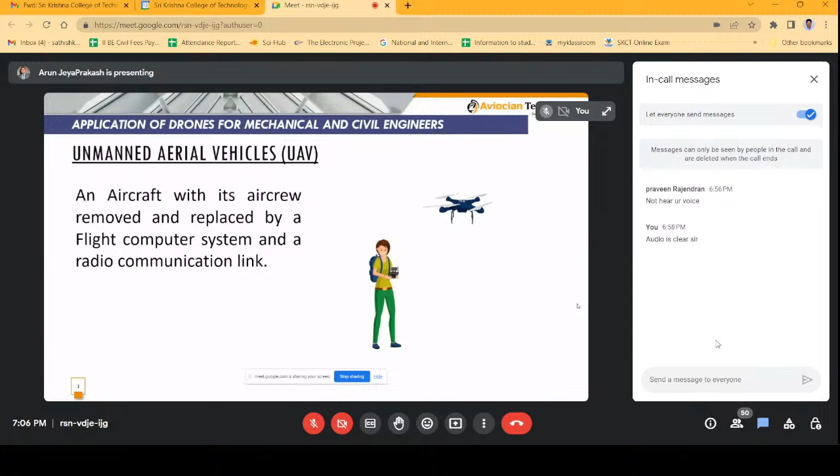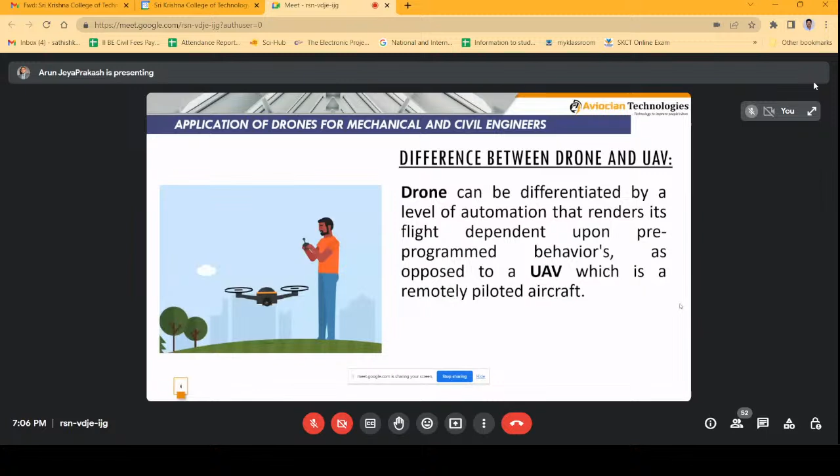So whenever we talk about unmanned aerial vehicles, another term that comes into the picture is drones. So what is the basic difference between a drone and an unmanned aerial vehicle? A drone itself is an unmanned aerial vehicle, but it has a level of automation that makes it a little different from a UAV. That is like automatic takeoff, automatically go around and gather some intelligence and come back and land itself. So this kind of intelligent pre-programmed behavior is what makes a drone more intelligent. So this is basically the difference between a drone and an unmanned aerial vehicle.

So whenever we talk unmanned aerial vehicle, the first thing that comes is the military application, because drones are not something very new. It's been with us more than a century, where Austria attacked one of the countries using balloons carrying weapons. So that is how the application of drones started, in protecting the country and its borders.

So over a period of time, there are many wars, and many countries have fought to protect their borders and protect their people. So during this war scenario is where the government invests a lot in terms of technology, R&D, to develop products and solutions to protect the country. So on that note, all these drones were developed over the period of time.

So in the commercial market, if we look into it, these are the different types of drones that are used: multi-rotor drones, fixed wing drones, single rotor, and fixed wing hybrid VTOL. So every drone has its own pros and cons. So depending upon the application, one has to select the right choice of drone.

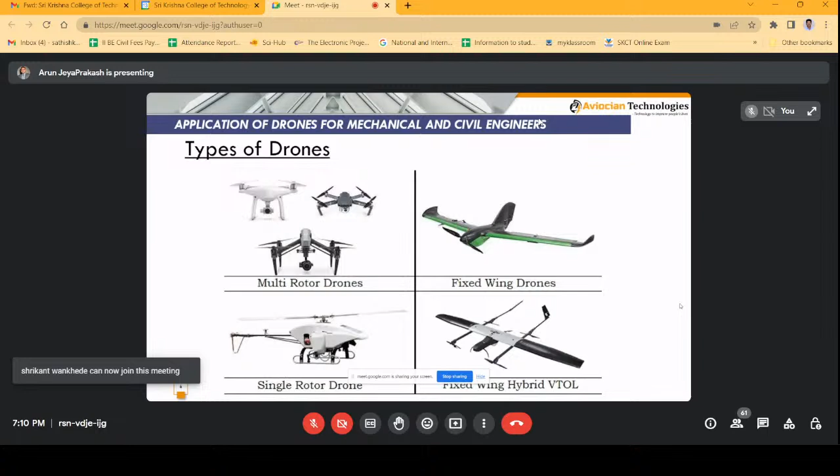So this is the introduction about the different drones used in the commercial market for different applications. And all these drones are more customized, with more power and more payload carrying capability in the commercial markets. So with respect to aeronautical or mechanical engineering, what the engineer's role will be is what I'm going to present in the upcoming slides.

So this is the Department of Defense Standard 2167A for any product development for drones, or any product. Say for example, the entire drone I have to design and develop, or a small portion or payload I want to develop for the drone, it has to go through all these processes. The upper one is about the hardware development, and the bottom one is for the software development.

Say for example, today a customer is coming to me and saying, Arun, I need a drone for some inspection purpose. It has to carry a camera payload of say 2 kg, and it has to fly for more than 30 minutes. So these are the requirements the customer is sharing. So based on the requirements, only then will the drone be developed. That is why the first step of this process is system requirement analysis / design, which means you are hearing the requirements from the customer, and only then are you going to develop it as a product.

So once you hear it from the customer, then you will have certain review meetings, and only then will it go for the hardware requirement analysis, where you will try to understand, to develop this drone and meet the customer requirement, what are the different hardwares we need to use in terms of engines, motors, or payload capacity. So we understand the hardware requirement analysis, and then we go for the preliminary design.

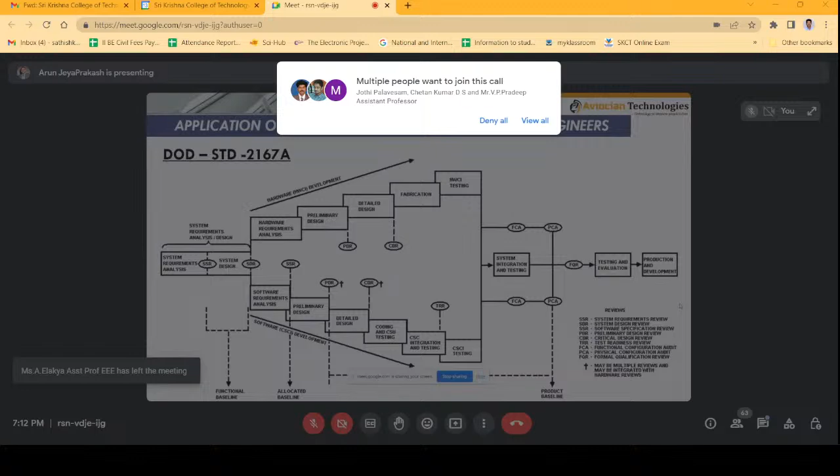So preliminary design is where the design will be done based on the selection of hardware components, because the primary requirement is you have to accommodate these components inside the drone for it to carry. So that is how the preliminary design will be done. Then after preliminary design, a review will be done, PDR, that's a preliminary design review.

Then after the team agrees to the meeting requirements, it goes to the detailed design, where with tools like CATIA or SolidWorks or Autodesk Fusion 360, the detailed design will be done in a 3D model scale. And then again a critical design review will happen to understand whether this design is meeting all the requirements, and then it will go for fabrication and testing and final evaluation as a product.

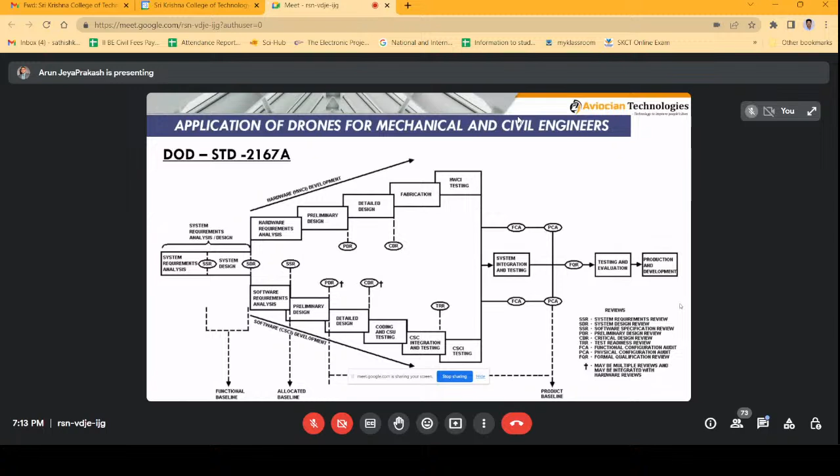So this is how the cycle will go for developing the entire drone, or even a small payload you want to develop. This is how the cycle goes. And the same goes for the software in terms of coding and testing. It will go instead of fabrication and production. So this is a standard process that is followed in any industry.

And when you talk about the phases of design, design basically has three phases. One is the conceptual phase, the second is the preliminary phase, and the third one is the detailed phase. In conceptual design, what you have in your mind, you will just express it with paper and pencil, just a rough sketch, like you just scribble it around or draw it. This is how I want the drone to be, or this is how I want the payload to be. You do a rough design, so that becomes the conceptual design.

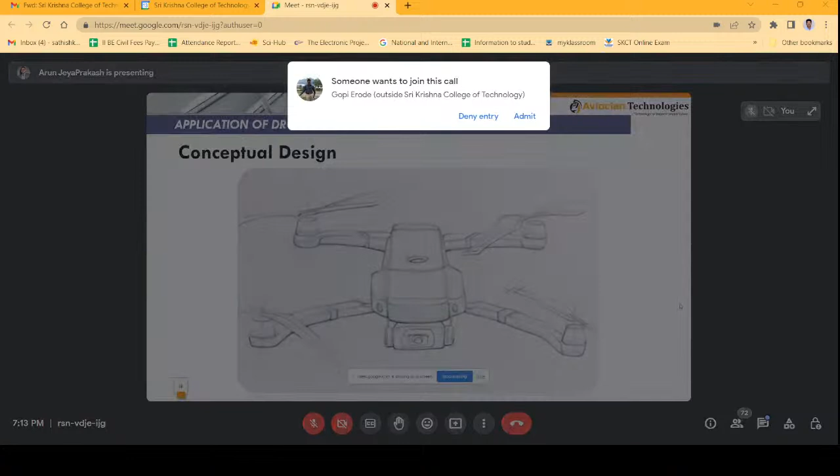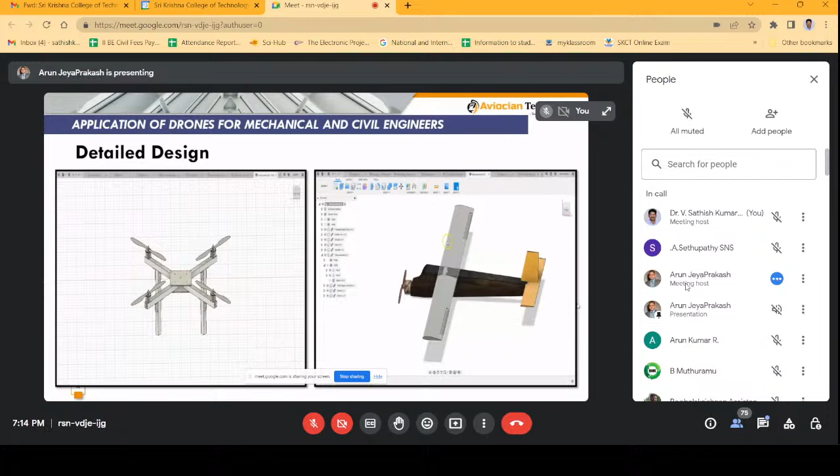So when you give some values to it, like say the arm length should be this much, or it should have a landing gear of certain height, when you start giving the values, then it becomes a preliminary design. You are able to make it more meaningful, and it will become detailed design when you understand every inch or parameter of your design. Then you can use software tools to design your own drone, whether it may be a multi-rotor or an aircraft.

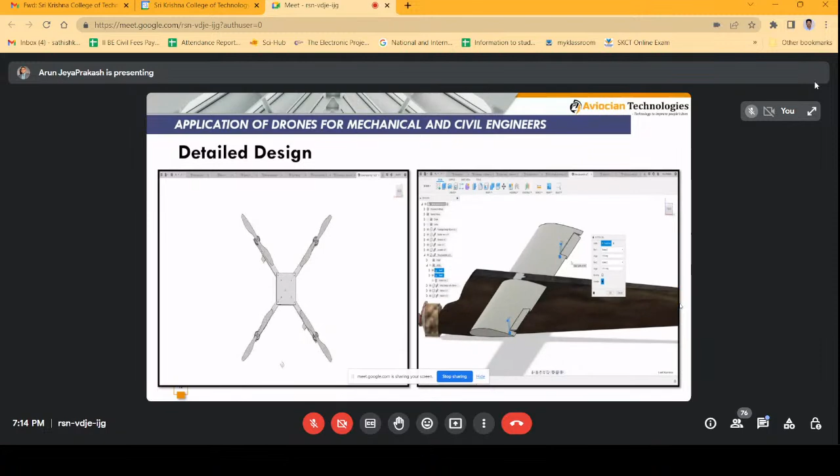You can use the softwares to design it entirely as a 3D model, and you can understand how all those different equipments will fit in the drone, including the payload. So that is what people have to do at the detailed design level. Once your detailed design is done, a very important phase that comes into the picture is analysis. Because you have designed it doesn't mean that it's going to fly or do great, unless and until it does certain simulations successfully. Simulations like aerodynamics, structure, and vibration.

I believe all these three can be related to civil also, because even in civil, tall structures are developed with some aerodynamic analysis. The wind flow over the structure is studied by civil engineers, and structure plays a huge role even for developing a drone. For civil engineers, for the structure, they do a lot of BIM and a lot of analysis. And vibration also plays a huge role in both cases.

In a drone, we cannot allow vibration, because these vibrations can make the drone unstable, and it can crash. So we need to damp out those vibrations. All these different types of analysis are supposed to be done by the mechanical engineers. This will be the major role for mechanical engineers, right from the design concept to the complete analysis, and showing the end user that this design will definitely work, it can carry the payload, and it can meet all your requirements. So this is a major role for mechanical engineers.

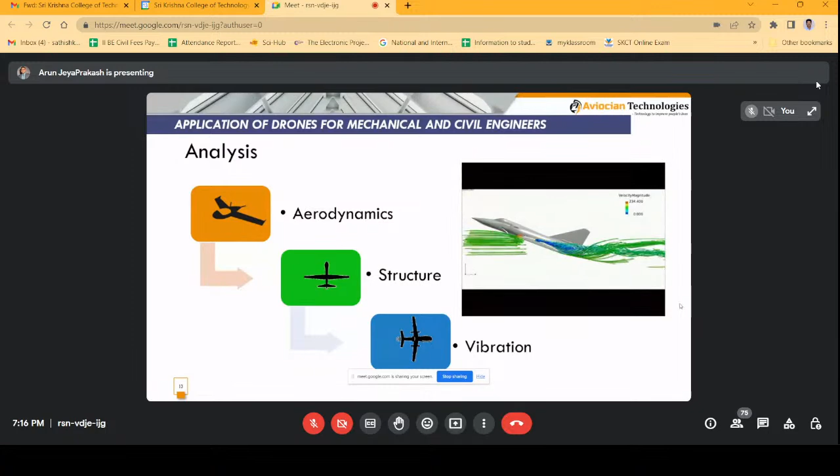So moving to a little bit of electronics, it also has to be a part of mechanical now, because nowadays EV vehicles are coming into the picture. All your engine kind of vehicles are now slowly getting replaced by EV, electric vehicles. Even the aircraft industry is looking at electronics, motor-based aircraft as transportation, and even drone taxis are also coming into the picture. So we cannot neglect the use of these electronics in mechanical engineering.

So mechanical engineers should have a clear understanding of the different components that are used to build these drones. These components we call avionics. Avionics stands for aviation electronics. How we are going to integrate all these different systems is also knowledge that is required for mechanical engineers. Starting from the motor, the BLDC motor, a brushless DC motor that's used in the industry for drones.

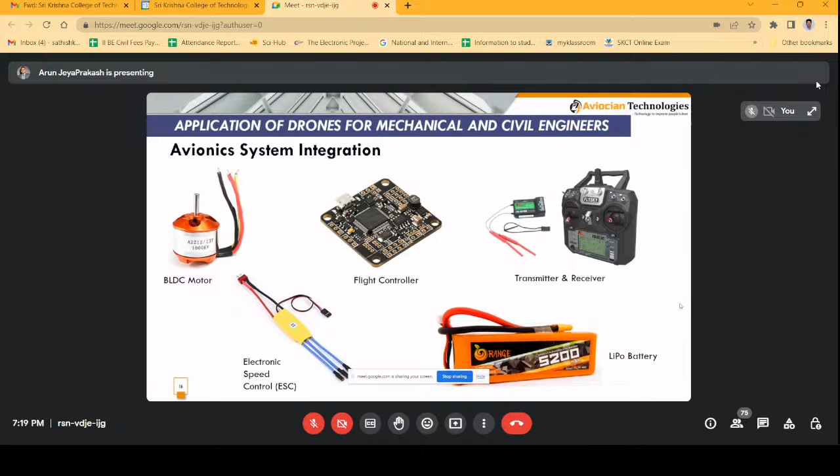When we talk about the flight controller, there are n number of flight controllers available in the market. So one has to have a proper understanding of what type of flight controller I should select for my own drone for certain applications. The choice of controller depends upon various parameters. If you want to develop the drone as a proof of concept, then you can go for a manual drone, just manually fly it, and show the proof of concept of whatever project you are trying to do. Or if the project intention is to show autonomous capability, then you need to select a flight controller that will allow you to integrate a GPS kind of system, where autonomous navigation is possible. That kind of flight controller you have to choose.

And again, the controllers will also be divided based upon whether you're going to use it for a fixed wing or for multi-rotor type drones. You can also classify whether it's open source programmable, so that you can do some Python coding or something and tweak it a little as per your requirements, or it's a closed one that doesn't allow you to make any changes. And the user-friendly interface, whether you are able to do all the interfacing properly.

And finally, the budget, that's also a major concern. When you develop a drone for a particular application or project, whether these types of controllers fit into the budget. Because as the number of features goes higher and higher, the budget also climbs up accordingly. So one has to decide based on the application and the need what type of flight controller to choose. This knowledge is also very important.

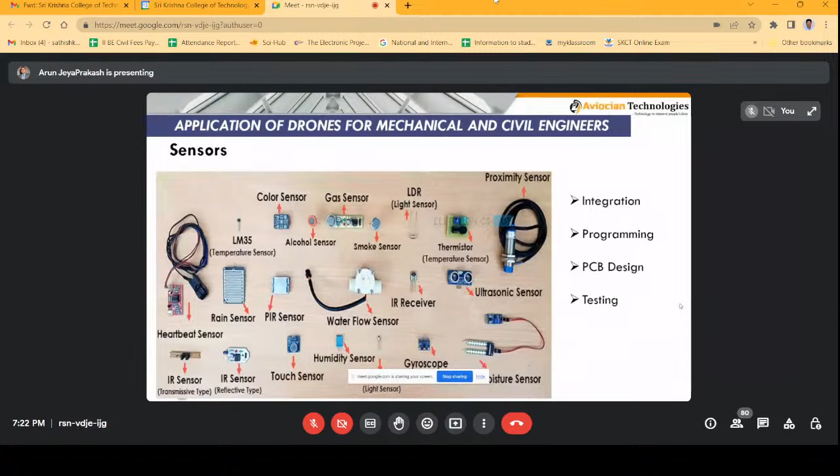Then high frequency structure simulation. This is the frequency simulation that electronics people normally use. So one can prefer this if they want to do some frequency analysis.

In terms of applications, last mile delivery is one of the important applications, where whatever item the person orders on an e-commerce platform has to come from a warehouse to the person's house. This is a major problem where the vehicle gets into traffic, and you won't be getting things in time.

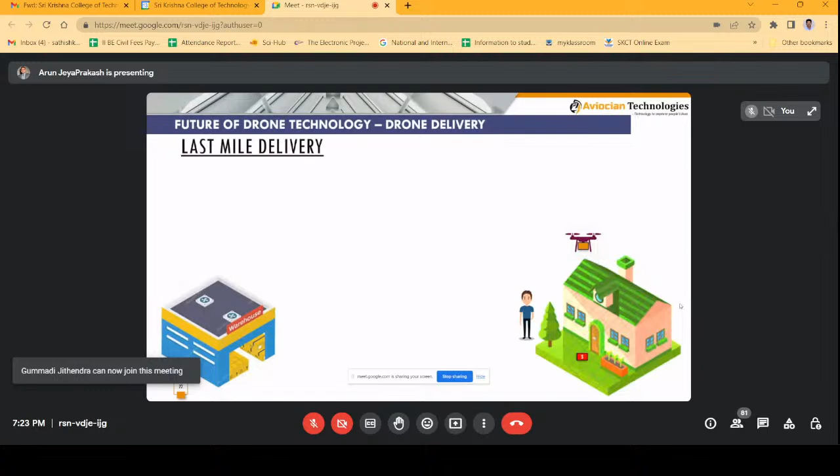So this is where the drone comes into the picture: you order things, and the drone can bring whatever you have ordered in say half an hour or one hour, and drop it in front of your house or on top of the roof. So this makes the last mile delivery problem very easy, reaching the customer at a faster rate.

Many companies are working towards the delivery application, and in many states testing is already happening for taking blood samples or urine samples from one location to a remote location. Even the postal department has recently tested the drone for postal delivery. And Zomato and Swiggy are trying to experiment with sending groceries faster to the end user through drones. A lot of testing is already happening in Bangalore and in Noida in the Delhi NCR region.

Amazon uses a mothership kind of concept, where the main ship will carry multiple drones with payload, fly to a particular region, and hundreds of drones will come out, deliver all the items to the customers, and go back into the ship again. They've been testing a concept something like this.

And food delivery, as I said before, Zomato is working, Uber is also working on such applications. Medical supply: many companies are already working on it nationally and internationally. Zipline is a well-renowned international company with Africa as a base, where they supply blood samples to hospitals and do deliveries.

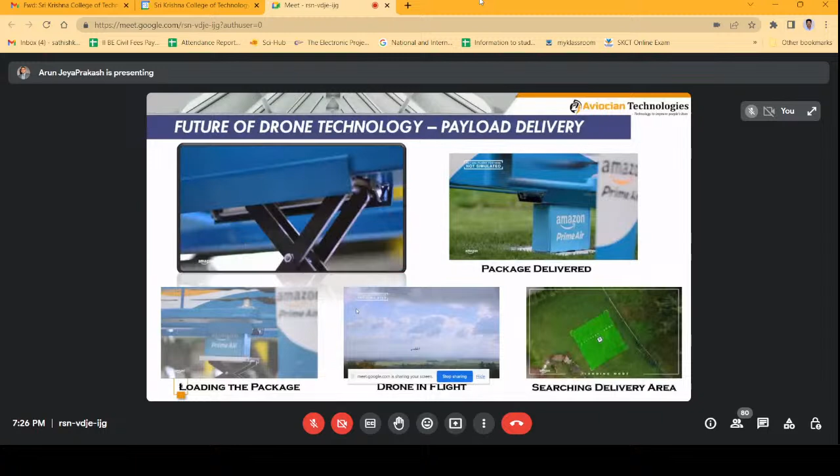The future is like this Prime Air; Amazon is already working on delivery. Another very futuristic development on the drone side is the drone taxi. It's an unmanned aerial vehicle capable of transporting people, or people are even using it as cargo to ship a huge containment from point A to point B, whether from sea to land, or from city to village or remote places. So this has been very useful.

The benefits of using this drone taxi technology are obviously that it's going to beat the traffic. It's going to fly in the air at a fixed altitude, with ease of travel, and it's quick to reach. Some of these are going to be pilotless, and some may require a pilot, like a normal taxi.

The pilotless ones will become like an Ola or Uber kind of app, where you book it through the app, the taxi comes, you get into it, it takes off to a predetermined altitude, and it drops you at the destination you put in the app. So it works the same way your normal Ola or Uber works.

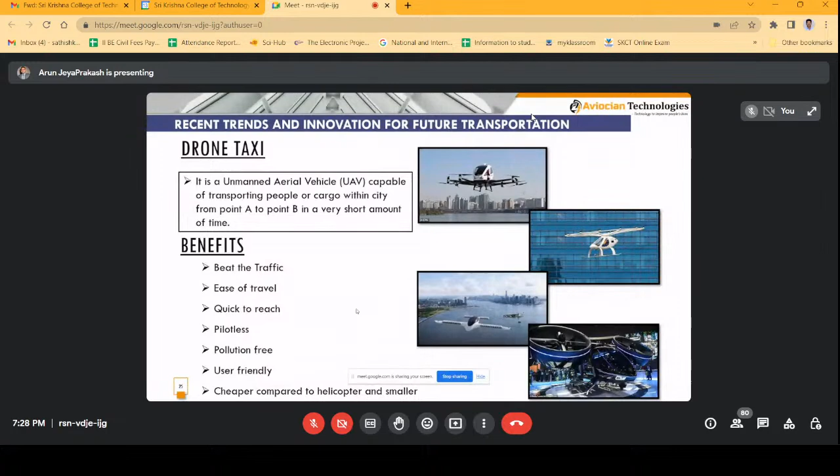Volocopter has already tested their drone taxis in Singapore and Dubai, I think. And Dubai, I believe, will be the first country to launch these kinds of taxis very soon, maybe by next year, 2024 or maybe 2025. I strongly believe these taxis are going to come into the picture for transportation.

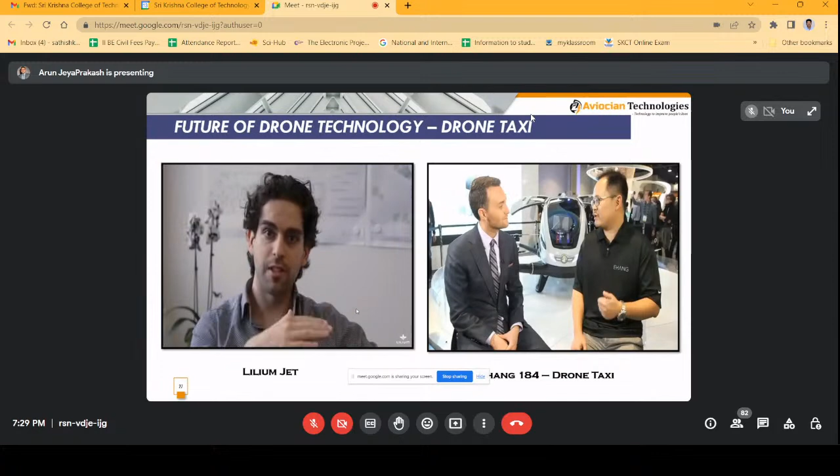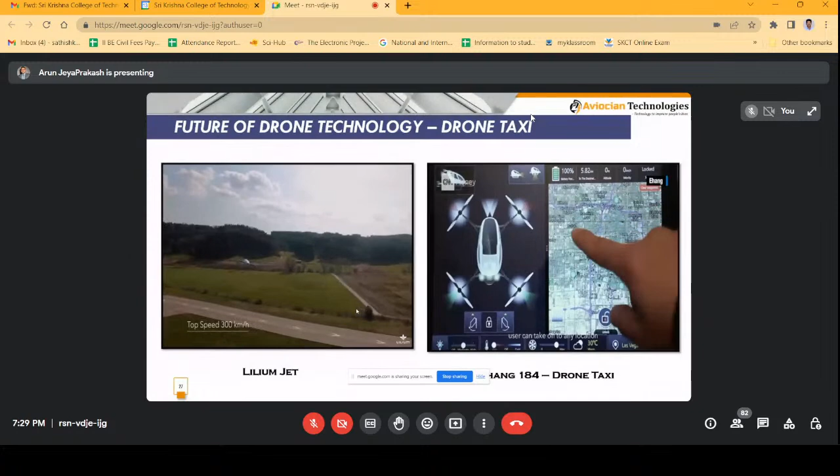These are some of the other companies with drone taxis. This is the Lilium Jet company. This is the EHang 184 drone taxi, again a small single-seater or 2-seater concept taxi. You can see it has a touch display. You just enter your destination, and at a predetermined altitude it will take off, fly, and drop you at the respective destination where you want to get down.

Up to this point, it's with respect to mechanical engineers, in terms of product development of a whole drone, or a component or subsystem of a drone: the procedure they have to follow, the design phases, which play a huge role, the analysis and simulations they have to do, and the later integration of various components into the structure and testing.

So they play a huge role in developing the entire ecosystem. I believe it more or less depends on mechanical engineers or aeronautical engineers, where mechanical is the core one. So it plays a huge role; they play a huge role, I strongly believe.

Moving to the second part, with respect to civil applications, I'm going to talk about the role of drones here. Remote sensing is one of the major applications, which is technically gathering information about an object without making any physical contact, which means you are gathering the data remotely.

Traditionally it is done through satellites, because the sun emits heat, and every object on earth has a tendency to absorb this heat radiation and emit heat radiation. That emitted heat radiation is reflected or observed by satellite-based sensors, and through that we gather the intel about the ground data. So it is done through satellites, and even through aircraft.

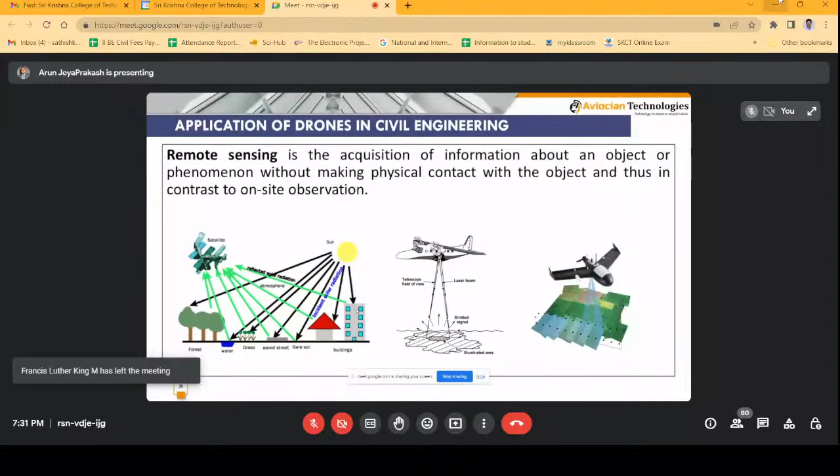So this is how the traditional process of remote sensing happens, where the sun is the energy source which emits heat energy. Every object on earth absorbs this heat radiation and emits heat, which will be observed by the sensors in the satellite, which may be hyperspectral or synthetic aperture radar, or different sensors. These sensors will capture all that information and give it to the processing station.

The processing station, for example, IIRS, the Indian Institute of Remote Sensing in Dehradun, is a processing station of ISRO where they have access to satellite image gathering, and there they have teams for different types of analysis, whether land use, land cover, agricultural growth in a particular region, or flood analysis or flood prediction in states like Uttarakhand or hill stations. All those teams do the analysis and give it to various other departments for application and implementation.

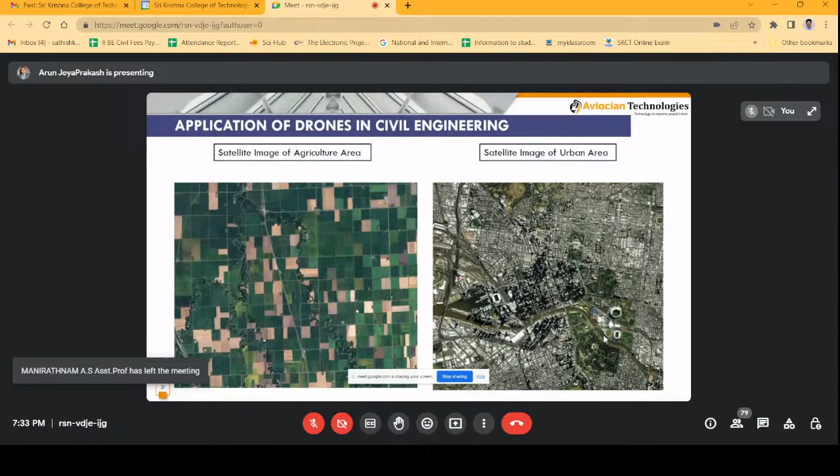So you can see here how a typical satellite image of an agriculture area or an urban area looks. The left side is an agricultural area and the right side shows the satellite image of an urban area. Here I would like to compare: satellite data is what we were mostly relying on earlier. Now drone technology has come and is trying to overtake. The pros and cons are in the upcoming slides, where we will try to understand drone technology with respect to satellite-based data gathering.

First is real-time availability. When we talk about real-time availability, the drone has more advantage, because today, if I want to do a survey at Sri Krishna College of Technology in Coimbatore, immediately I can take a drone, go there, fly the drone, do the survey or gather the information, and then do the post-processing and get the intel I require. So whenever I want to do any survey, I can do it as per my wish. For real-time availability, the drone has a very good advantage.

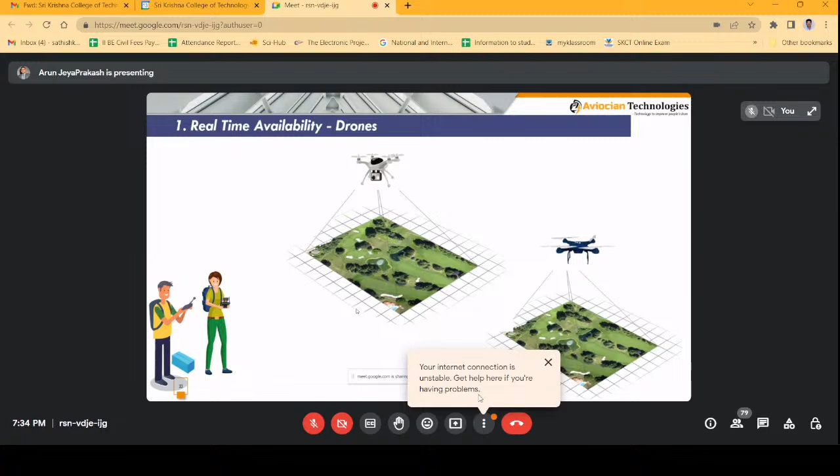Compared to that, the satellite is not available as per our need, because these satellites are orbiting at a very high altitude, and pass over a particular region only on a particular day or week. So gathering data immediately is not possible, because these satellites pass maybe once weekly, and the time is also a constraint. If it comes at a cloudy time, it's an issue. All these constraints make real-time availability of satellite data a bit of a disadvantage.

The range of drones is limited to a particular region. For example, a drone flying at 400 feet can gather intel on around 80 or 100 acres of land, and after that the battery drains out. So the drone has to come back for a battery change to do further survey. That's a little drawback: you need to do this battery change every 20-30 odd minutes.

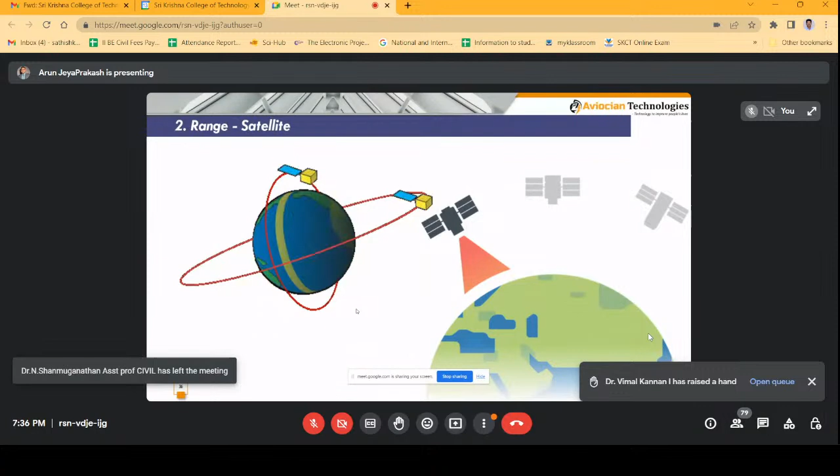Whereas the satellite is put at a very, very high altitude, so in one swath it will cover the entire city's data. So for large-scale applications and analysis, satellite has the advantage in using the data sets.

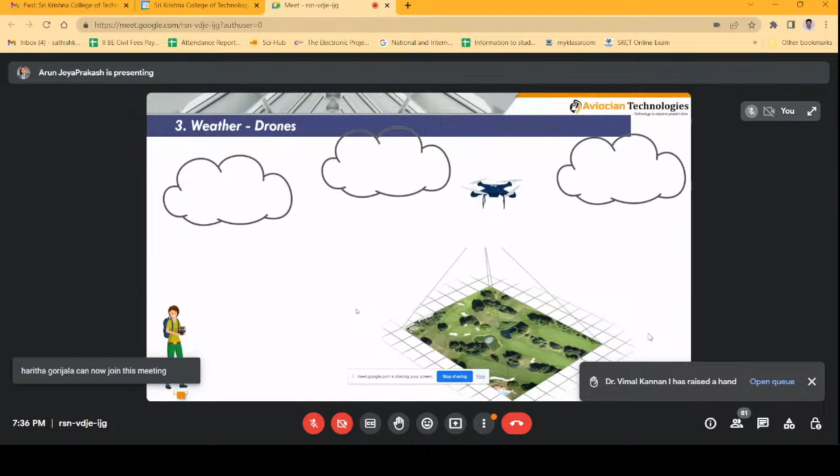When it comes to weather, of course, the drone has the advantage, because irrespective of whether it's cloudy or sunny, these drones fly at a low altitude of around 200 or 400 feet and gather all the images and data required for the surveying process. Whereas satellite sensors cannot penetrate the cloud and collect information. So if it is cloudy, even though it passes your region of interest, you won't be able to use the data for your application.

Unless it's microwave, because microwave can penetrate the cloud, but you will get the data in black and white. You won't get the actual features of the ground. So on that note, cloud can become a drawback for satellite-based data.

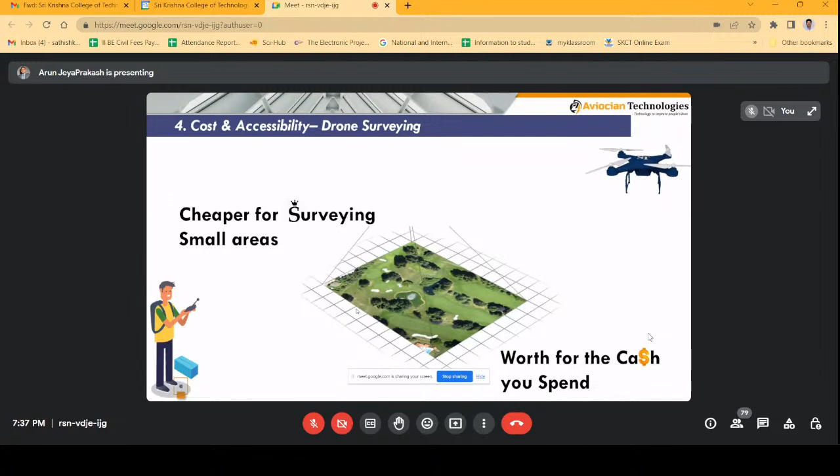Cheaper for surveying smaller areas. Of course, drone is very cheap. Once you invest in procuring a drone, you can do a survey of, say, 40 acres or 100 acres, depending upon whatever altitude you fly. So for small areas you can always do the survey. It is always worth the money you're going to spend. So it is a really good investment, investing in drone-based surveying.

Satellite is cheaper for surveying larger areas, but the difficulty is that it's hard to get live satellite data from ISRO or IIRS, because it's not commercially available for anybody. Whatever data we get may be a week old, a month old, or maybe a year old. That older data is what is provided to common users for academic or research purposes. So it's very difficult to get live data, whereas with a drone you get live data about the field or the surface immediately.

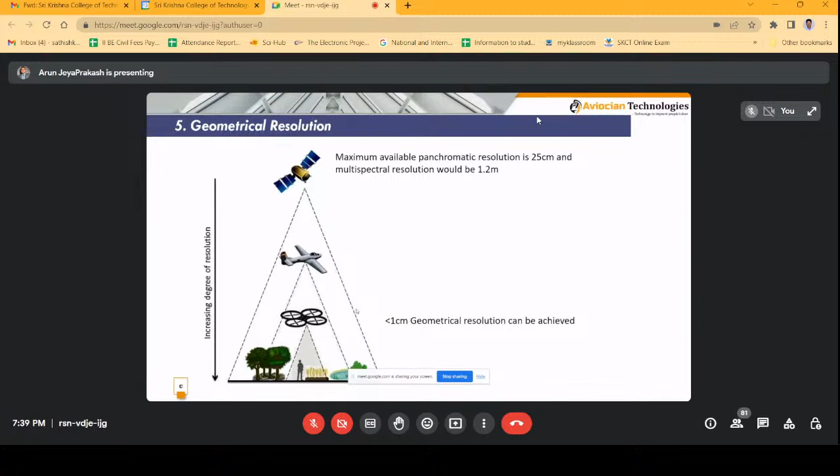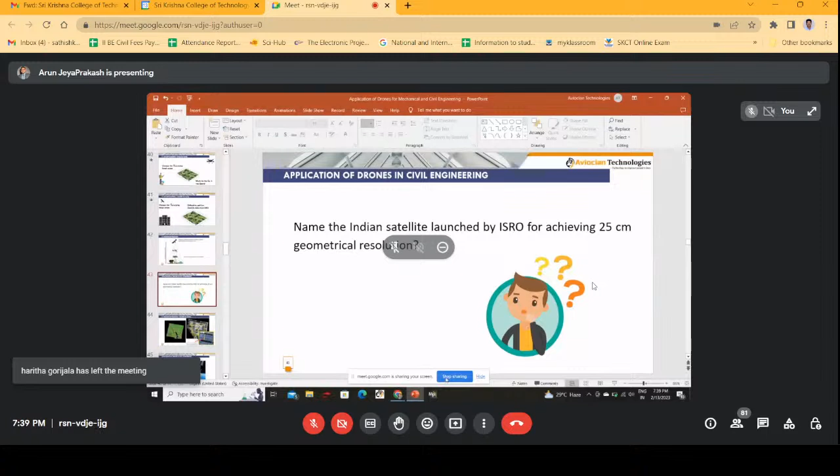This is for the audience: name the Indian satellite launched by ISRO for achieving 25 centimeter geometrical resolution. Any idea in the audience? You can put it in the chat box. The chat box is open. So the question is, is anybody aware of the satellite which can give you 25 centimeter resolution?

Yes, we are getting some answers. Cartosat 3, great. Yes, Cartosat 3 is the right answer. Dr. Muthukumar, Dr. V. Satish Kumar, Satya Prabhu, Ishwar and Nandiappan. Everybody is right. Cartosat 3 is the one which gives that accuracy. Okay.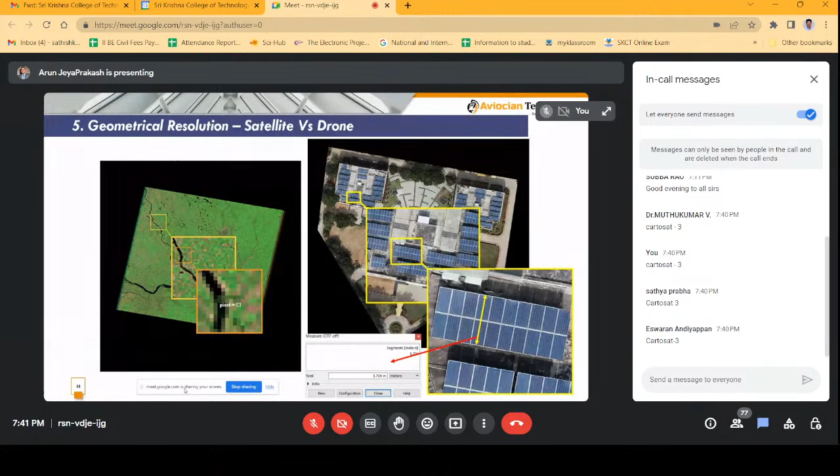This is how the geometrical resolution of satellite versus drone looks. To give you a clear picture, on the left side is satellite-based data, where if you want to closely observe any area and keep zooming, this is how the data gets pixelated. Whereas with drone-based data, you keep zooming and the clarity is so good you can do physical measurements also.

For example, here is the solar panel on the rooftop. You can even measure how many meters the width or length is, or what area is available on the rooftop for solar panel installation. All the data is very clear for us to understand. This is what helps, even in the survey process, to get accurate survey results.

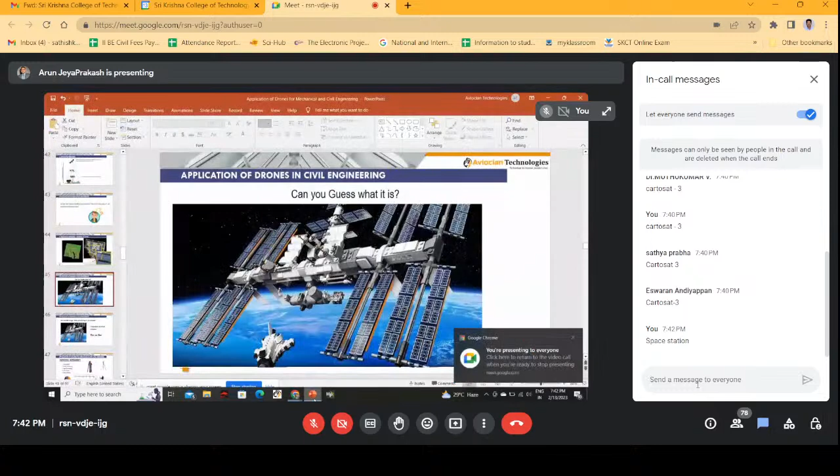Okay, so we talked about satellites. Can you guess what this is? Again, for the audience, can you guess what it is? In the chat box. Can you guess what this is? Okay. Space station, satellite in moon.

Space. Okay. So yes, it is the International Space Station, basically ISS. A lot of research happens here. In zero gravity, they try to understand things and do a lot of experiments. It is the International Space Station.

Now the next question is, can you see this International Space Station with the naked eye, standing on your housetop, terrace, in the garden, on the roadside, or in your colony garden? Is it possible to see the ISS with the naked eye? Again, put your comments in the chat box. It's not possible. No, sir. There is one yes. No. Okay.

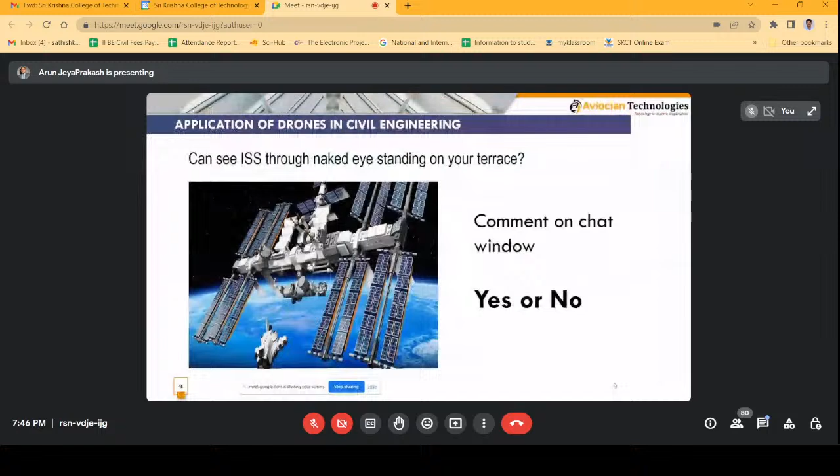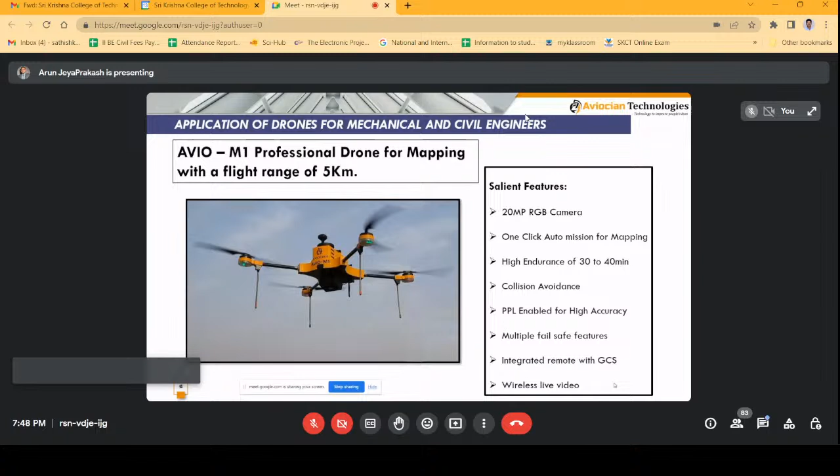It comes with an integrated remote and transmits wireless live video. Once you use this professional mapping drone for surveying, all you have to do is set a plan in an app: which area I want to cover, what altitude I need. Immediately it will tell you how many acres, how many images it's going to capture, and what battery level is required.

Sorry, what is the battery level that's required to cover this entire area? So you can see here some 93 acres are covered in 2 batteries and 30 minutes. Just imagine, in 30 minutes of time you are covering 93 acres of area for mapping application. So that's the beauty of it.

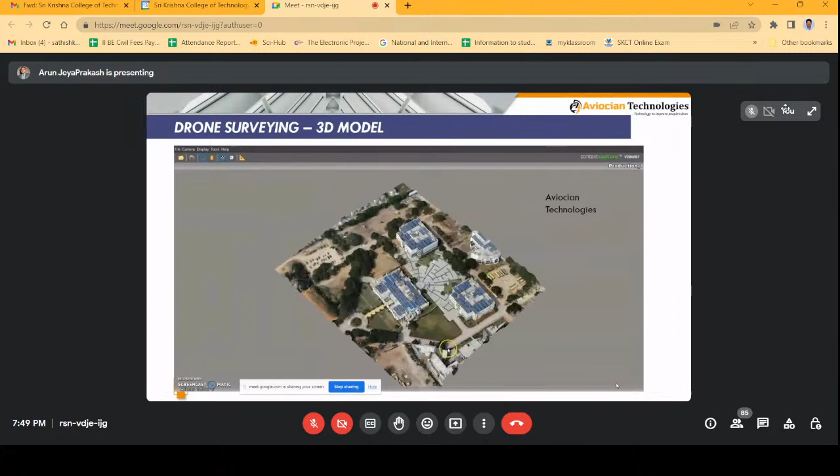So this is a sample, one of the customer locations during our workshop training program for the civil engineering students. So we have captured their campus, and we have created a 3D model of a small portion of their campus. So here you can see, once the 3D model is created, the civil engineer need not go to the field for measuring all the data.

So here you can do all the 2D, 3D measurements. Say, for example, I want to do a 2D measurement, click around the 2 points, select the distance. It will tell the distance in terms of meters. In terms of surface area calculation, click in 4 places, and it will tell you what is the area in meter square. You can understand what is the empty land area or built area already. So you can measure very easily.

Even you can do volumetric estimation. That's where the mining industry is using this thing. Say, for example, some construction material is dumped over here in the campus site. I want to understand how much material is dumped. So you just select the points around the material. It will tell you the cut volume and fill volume in meter cube.

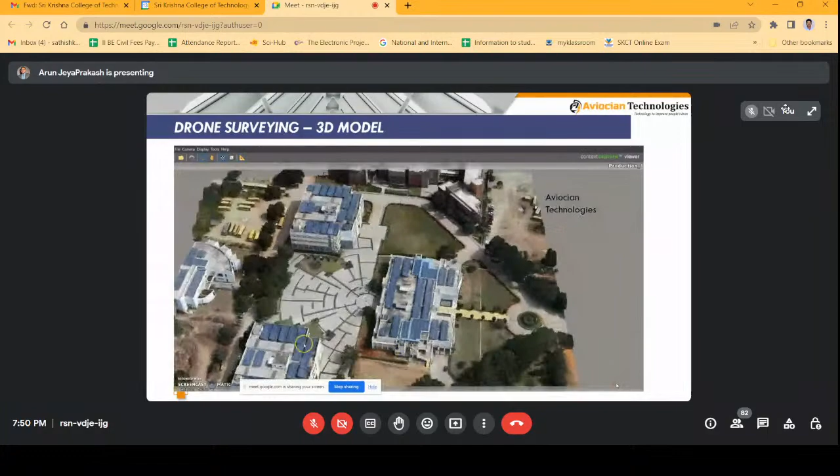So this is how the drone technology is making life easy, which means you need not spend hours and days on field gathering all the elevation points and data. All you have to do is a flight plan, fly the drone, collect the images and use the software for post processing.

So this is done using Bentley, and we are the technical training partner for Bentley all over India. Using that, we've been sharing this knowledge all over India to civil engineers in academic institutions. So in this way you can save a lot of time.

So apart from this 3D model, what are the other outputs you can generate? You can generate orthomosaic, you can generate contours, you can generate DEM, whether it can be a DSM, digital surface model, or terrain model, or the 3D map. You have already seen the output, how it is.

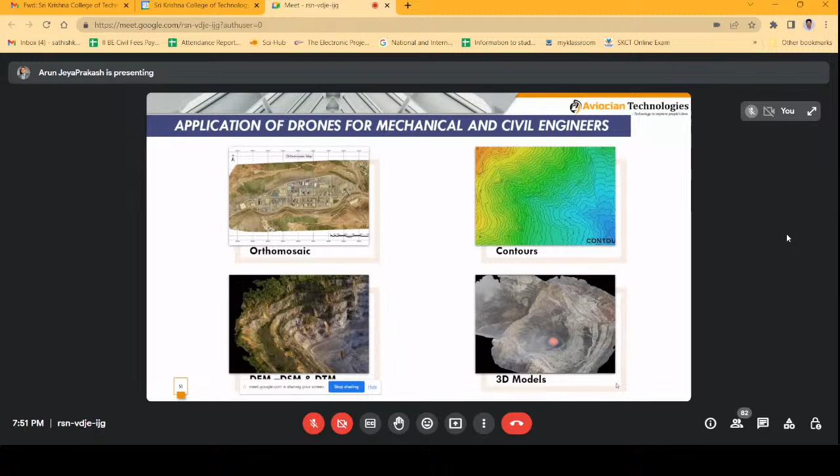So when I talk about orthomosaic, ortho photo is nothing but a 2D view of your customer location. So this is a customer location, assume. It gives the top view, the 2D view. It is basically an image which is rectified for all the corrections, geometrical corrections, the earth rotation, and all the distortions are removed, and it gives a scaled version of your actual customer location.

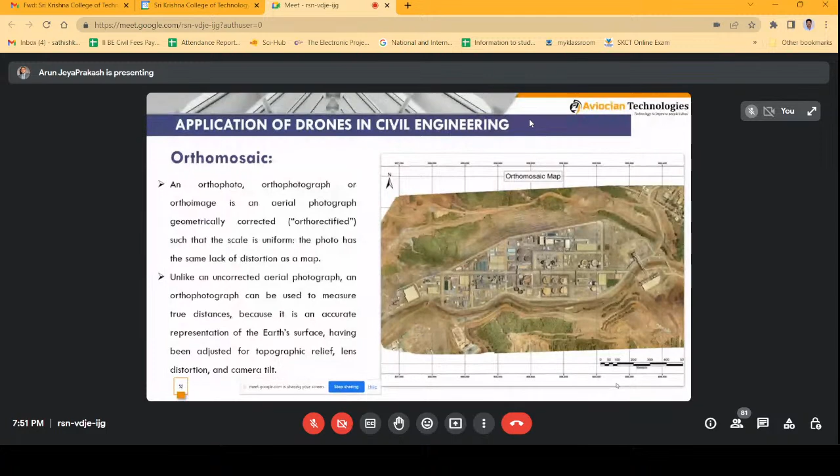Here you can do all the 2D measurements, like what is the length of the road, or width of the road, or the area of the built area or empty area. So all those measurements can be done. This is how smart city plans are done using drones. You do the survey, you plan where you want to build a school or colony or medical facility or dumping area. So every plan is done through this drone-based data.

Contours are the map that joins the same height, which means these lines are going to tell what is the elevation that's present in the surface. Because before starting any project, one has to understand the elevation that's there in the site, and they have to level it. So they need an understanding of these elevations in the surface. So to measure all the contours also, your drone data helps out.

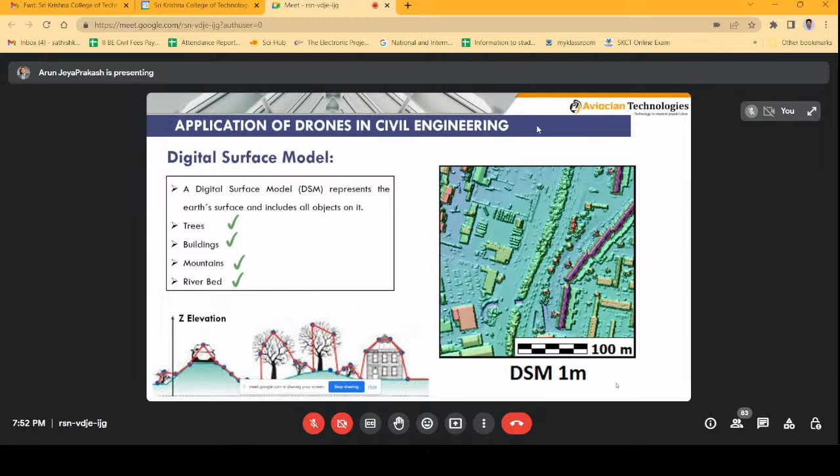Digital surface model. Digital surface model means whatever object is there on the earth, whether it can be a tree, building, man-made objects, car, whatever you park, or stone or plant, everything will come into picture here. So everything, trees, buildings, is included into it. All those data you will get as elevation data. You can have the measurement of elevation of buildings and everything that's present on the surface. So that is nothing but digital surface model.

Digital terrain model is bare ground surface, which means your trees and buildings are completely removed in this. So without that, whatever model you get is the digital terrain model, because sometimes we need to understand the terrain.

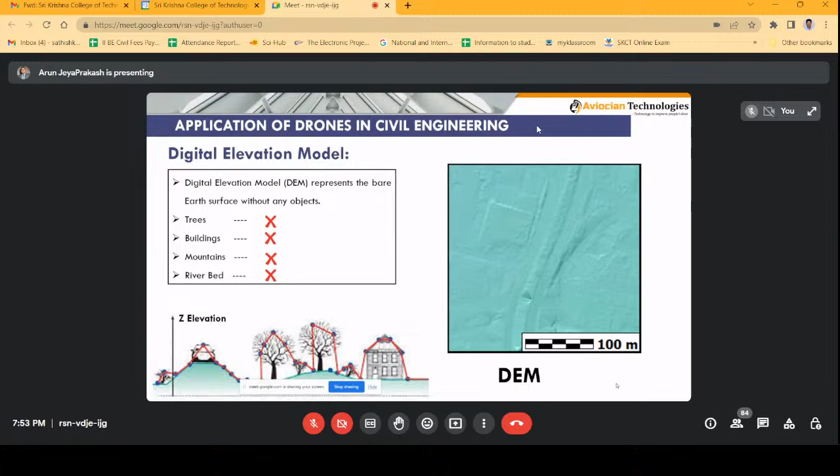So the major advantage of using this drone technology for surveying is that it drastically reduces the time you're going to spend on the field collecting data. Say for example, you want to collect data for a 1,000 acre land survey. Even if you have a very good team, it might take a week or more to gather the data. That also depends upon how hostile the environment is going to be. Sorry, not a week or two, it will take a month or more than that.

I'm really sorry. A week or less is only for drone, because normally 1,000 acres can be done in around 2 to 3 days of data gathering and another 2 days of post processing. So maybe in 5 to 7 days you can generate the entire report and deliver it to the customer. So that is how it makes life easy, right? 1,000 acres of information in 5 to 7 days is a huge thing for infrastructure projects. That is why even governments are using drones for infrastructure projects, to execute them in a short timeline, saving a lot of days.

Second is the georeferenced aerial data. Every image the drone clicks, every pixel of the image has the latitude, longitude, and altitude information from sea level. That is what we call georeferenced data, and it is of very high resolution; you can get as sharp as 1.5 centimeters per pixel.

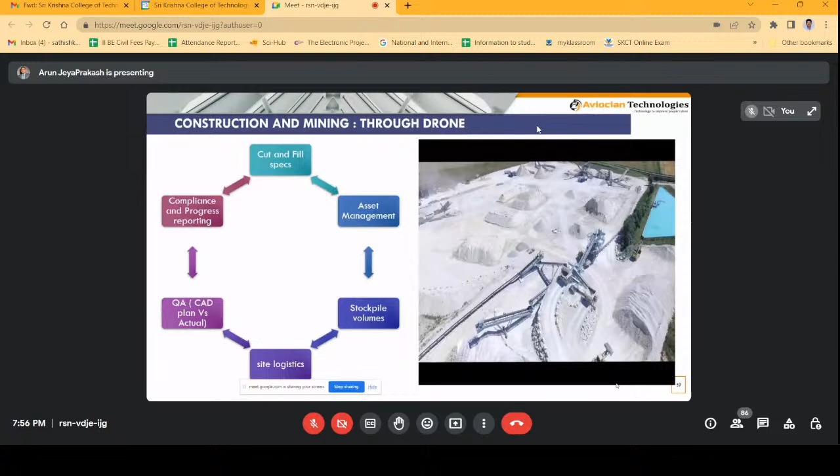More applications are in the construction and mining industry also, where they've been using this technology for understanding the cut and fill volumes, asset management, safety management. They are using stockpile volumes, logistics when they want to refill the inventory. The owner of the site might be remotely in some other country, but you can generate all this data and present it live, so he or she can understand very easily what progress is going on at the site.

Dam inspection, canal and dam inspection through drone, is very, very important, because in our country we have 1,000+ dams, and most of these dams were built a century ago, during some king's time. Since they're that old, they need very frequent monitoring so any crack or leakage is detected. Since these dam structures are very tall, you can use a drone to fly around, map it, and see whether any crack has developed, the width of the crack, the depth of the crack. All those things you can measure, so this inspection data helps them take rectification action easily, so it won't lead to any breakage of the dam, and any disaster can be avoided. So in that way also it's been used.

Even the PM has launched a project called Swamitva Yojana. Even nowadays, we have some disputes in land records, mostly in villages: this land is mine and not yours. A lot of disputes are there. And in the revenue department, the papers are decades old and degraded. So they want to convert all this land data into digital form.

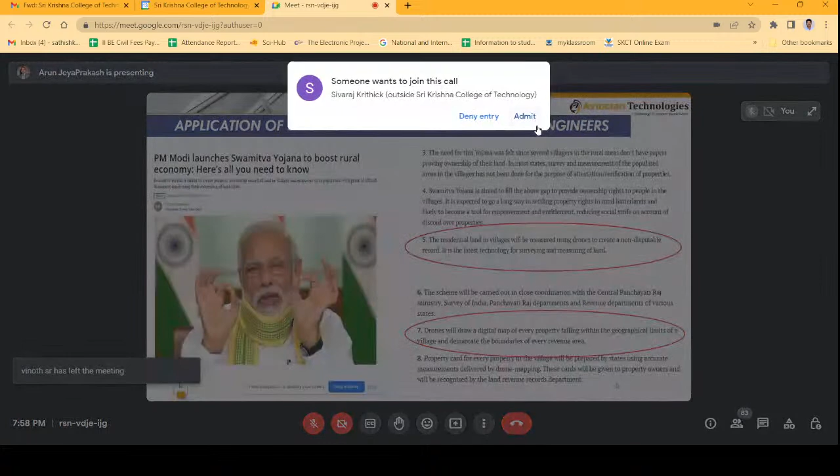And now they are doing it with drones with this project, Swamitva Yojana. Already several lakh square kilometers of area have been digitally mapped, and primarily the drone industry has helped to achieve that. And the PM has also issued a property card, just like the Aadhaar card, for your property. So that's how the scheme is using drone technology.

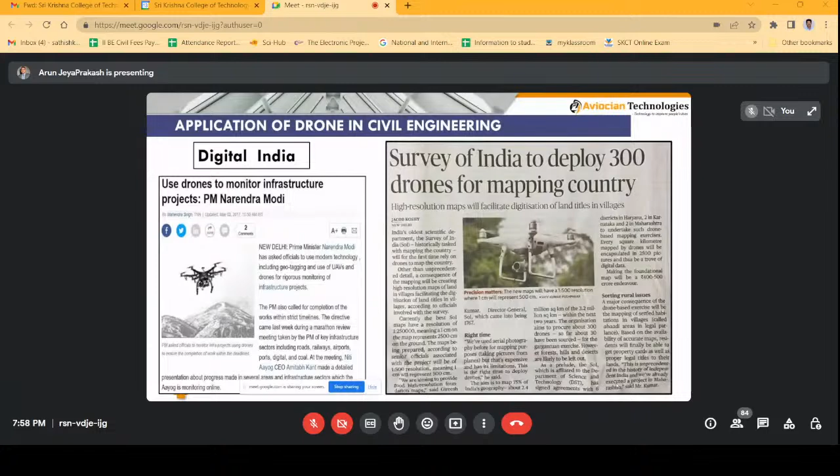So in infrastructure projects, as I said before, the PM already insisted on using this, and every department is using this drone technology. The Survey of India is collaborating with many private drone companies. They are deploying drones to digitally map the entire country to generate high resolution maps.

NHAI also recently made a monthly drone survey compulsory for all national highway projects, to understand the progress of construction, how the roads are maintained, and whether any potholes or cracks have developed over the roads over a period of time. So they've been using the technology to monitor and understand the highways.

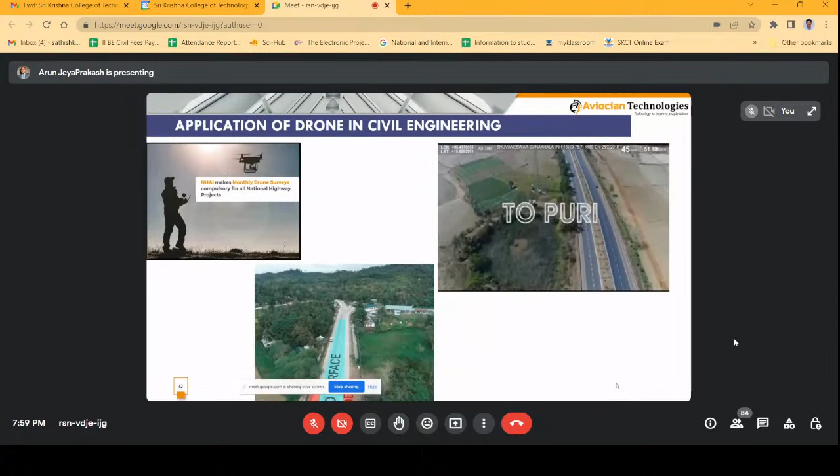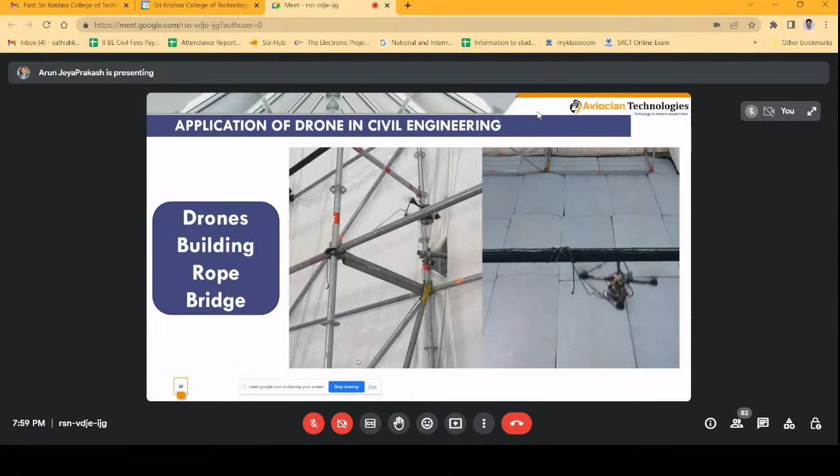This is a research area where people are using drones for building a temporary rope bridge. Here you can see that all these drones are coordinating like a swarm. They are coordinating with each other, trying to build a rope-based bridge. I'll just move a little forward to show you.

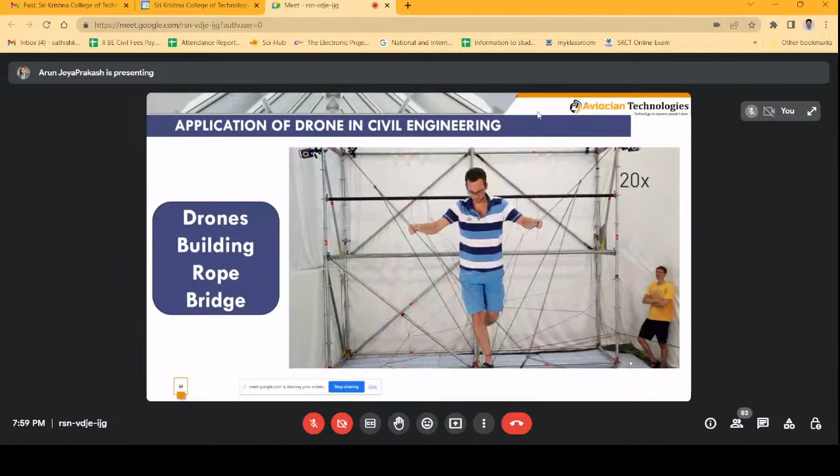So it's been programmed, and finally it's been tested by people walking over this structure to see how good it is. You can see people were able to walk on it; that's how strong it is. So in the event of a flood where bridges collapse, some temporary structure has to be created in a short time. This is where this kind of technology can really come into the picture.

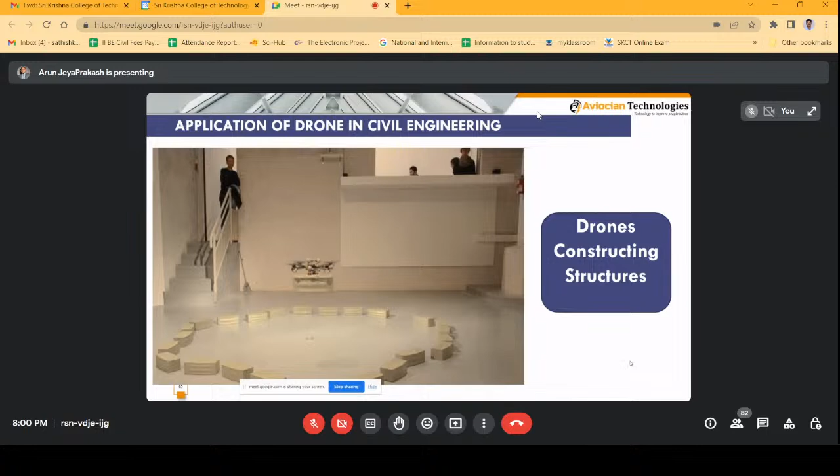This is again construction using drones. This is future technology where drones can be used for constructing your buildings in the near future, where you share the design with the engineer, and it will be programmed to do all the construction by itself. Here you can see many drones coordinating to create such a tall, beautiful structure. This is also under research, and this can be the future, where these machines do construction of structures at a faster rate and in a safer way.

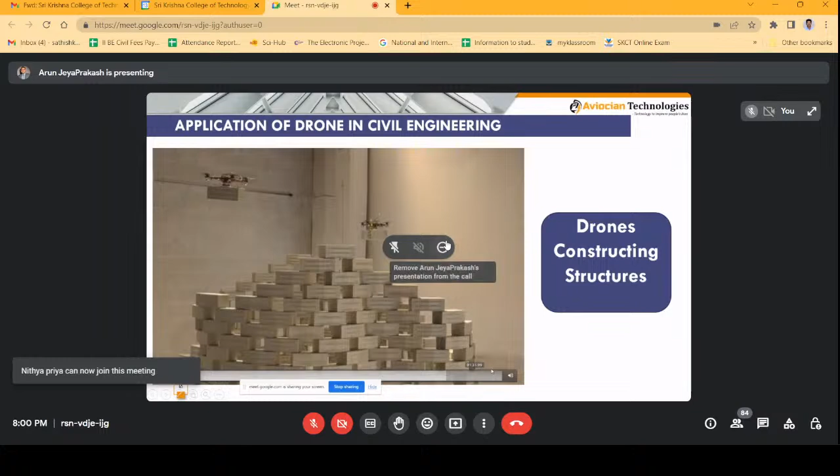Now and then, a lot of tenders happen with respect to drone technology, for drone requirements for a certain application where they need to customize and build drones. Even now defense is releasing a lot of tenders for immediate procurement of heavy payload drones, where engineers are required to design and develop drones to carry a heavy payload like 50 kg or 100 kg cargo.

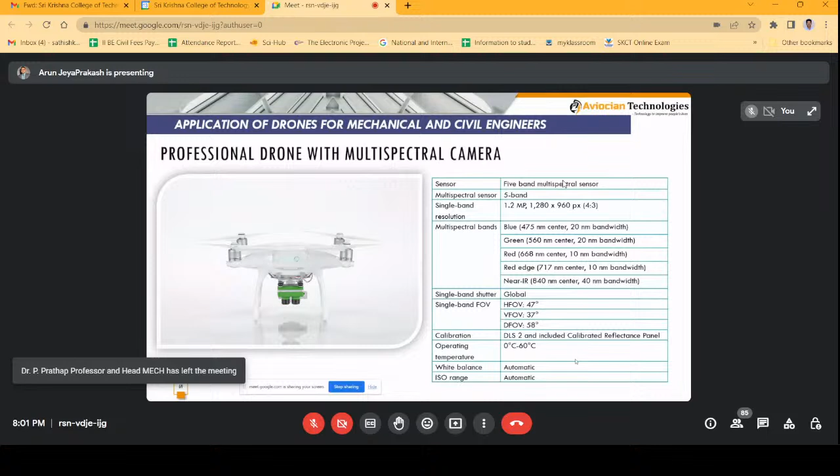So precision agriculture is another area where drones are widely used. Here, two types of drones are used. One is the drone with a multispectral camera, which can capture images in the visible as well as the invisible spectrum, and it can help to post-process and identify where in the entire field the crops are healthy or unhealthy, by generating a map called the NDVI, normalized difference vegetation index.

And another type of drone that everybody must know is the spraying drone, which sprays pesticides or fertilizers onto the crop area. It not only makes the work very efficient, covering 1 acre in 5 to 10 minutes, where the traditional way of manually spraying takes 1.5 to 2 hours, but it also helps the farmers stay healthy, because these pesticides are toxic, and when they walk and spray manually, they tend to inhale them, which becomes very hazardous for their health.

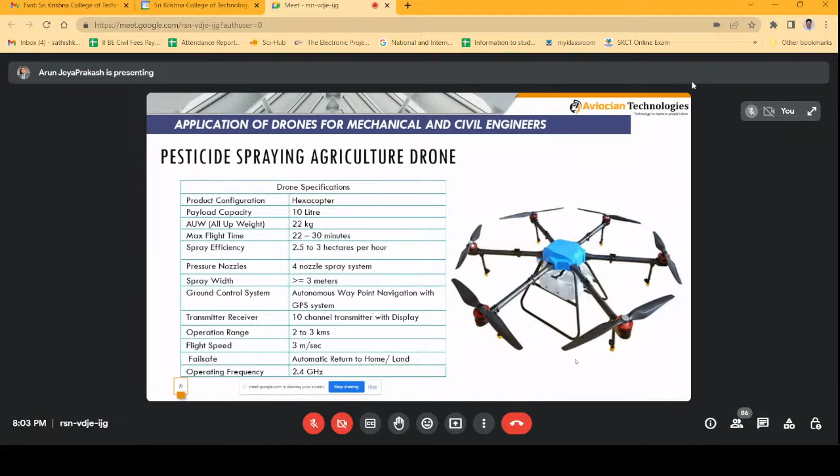And there are a lot of cases where people lost their lives because of those incidents. So here it not only improves work efficiency, it also saves the farmer's health. So that is one good way to look into this technology. This is a small glimpse of what it can do in terms of the agriculture field. So this is also something we provided to customers as per the requirement, 10 liters or 15 liters; we build it and we provide it to them.

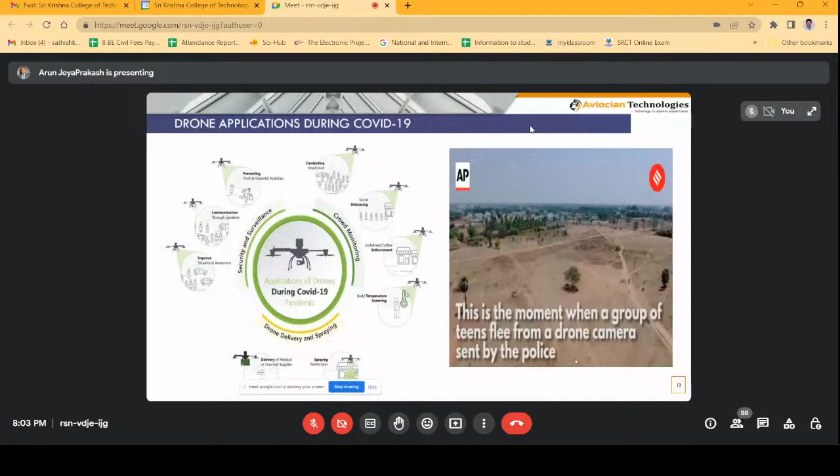During COVID, we have seen a lot of applications in terms of making sure people follow the curfew, and identifying crowds of people who are misusing those things and not following the laws. They've been tracked by the police, and they've been chased out. So these are some applications, checking whether social distancing is being followed, and some spraying is being done. All those things were done through speakers, with the police department involved in educating people about the COVID protocols.

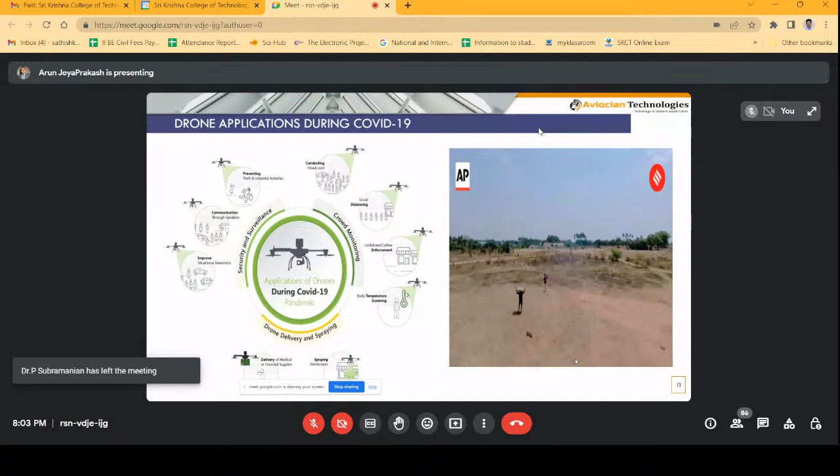And locust control is another application, where locusts are a group of insects which spread over kilometers. They attack the field, and in 1 hour the entire field will be gone. So those locusts are also destroyed using drone spraying. Other departments, like the forest department, can use this technology to identify poachers who kill animals for their skin and tusks. So there also you can use this technology to identify and catch them.

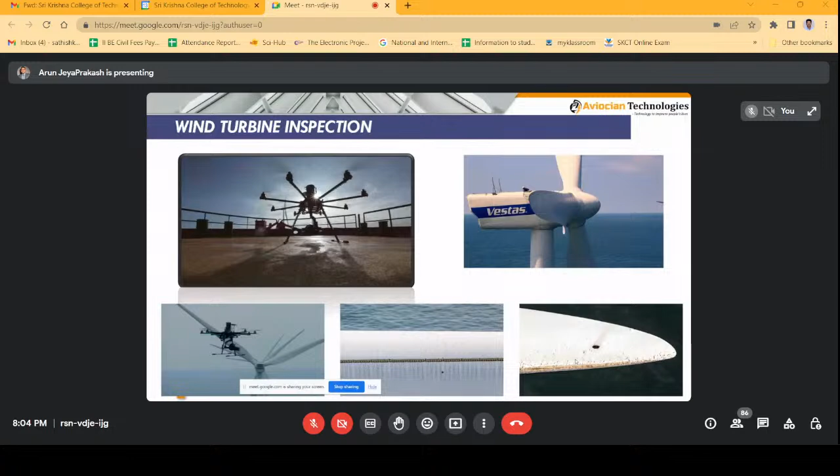Wind turbine inspection is another major application, because these turbine blades are normally 100 to 200 feet in size, and it is difficult for a human standing down to inspect, or climbing high is also a risk to their life. So here a drone can fly and you can understand exactly which turbine has a crack or corrosion.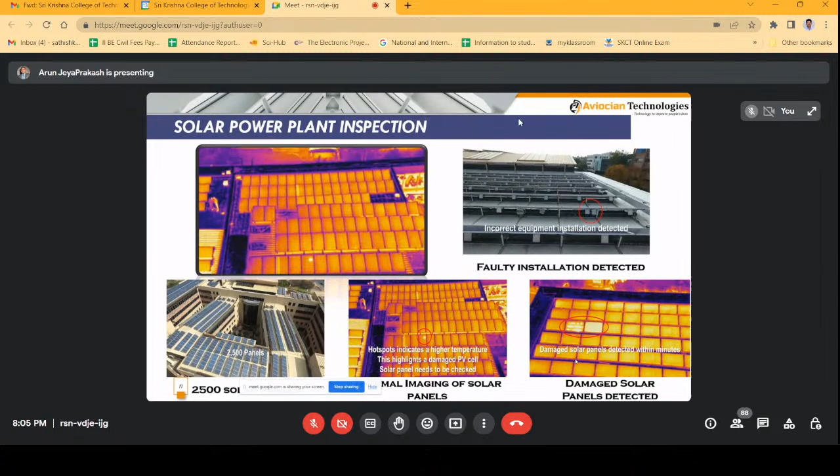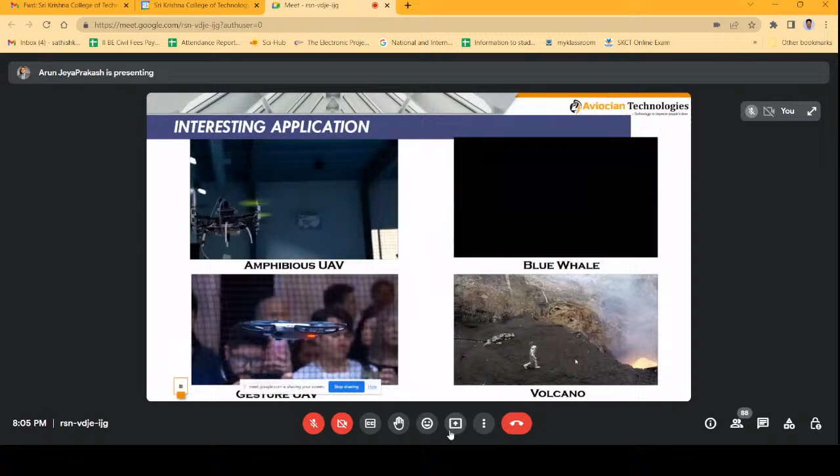These are some of the other interesting applications where drones are used to fly over the surface and underwater, and some were used to capture different views of video. This is a gesture drone, so the drone is controlled using hand gestures, which means using hand signals, computer vision and machine learning, people were able to program it to understand and give commands. And people were even using drone technology to gather intel about a live volcano, as you can see.

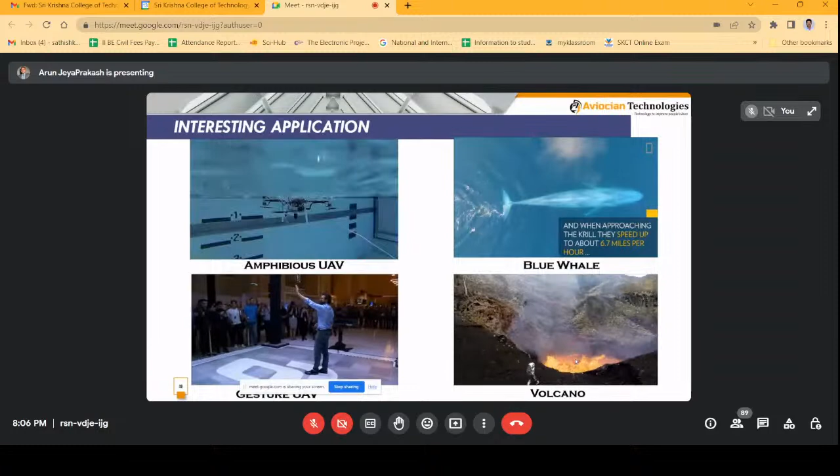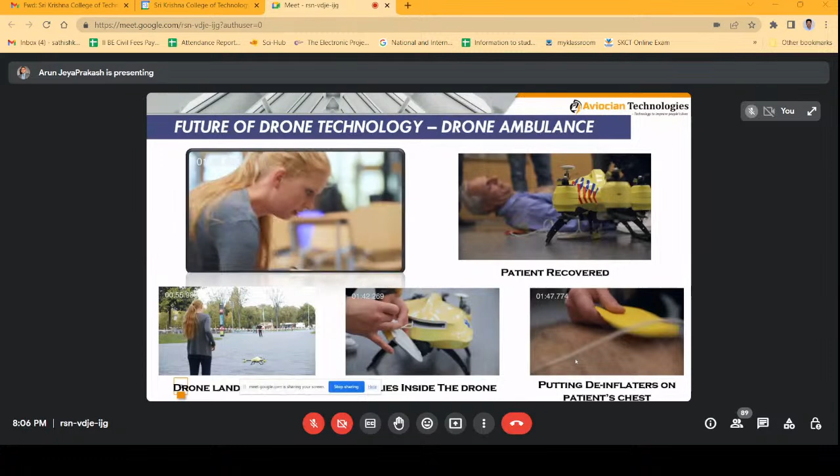This is the application I've been telling you about, the drone ambulance. Here the story is portrayed in such a way that the girl is walking with her father in a mall, and the father has a cardiac arrest, and she's calling for emergency. So before the ambulance arrives, the drone arrives there first, and through the camera, the doctors are advising her to put on the defibrillator. Normally, a defibrillator is the one which gives the shock to recover from cardiac arrest.

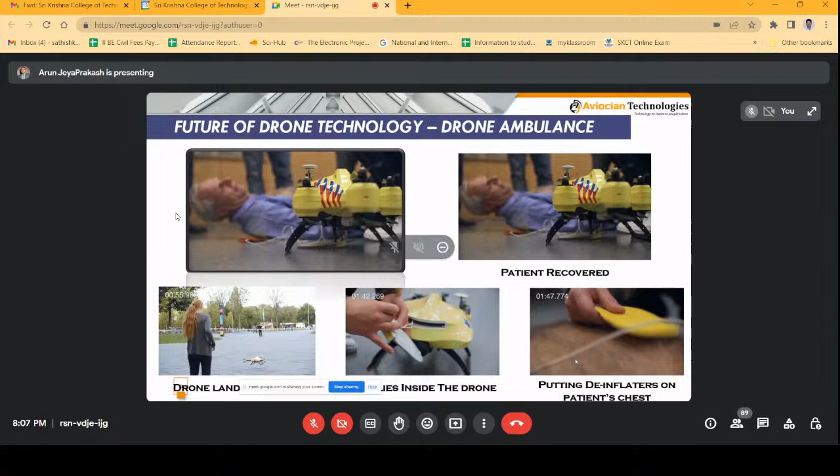So she's been advised to place the leads on the chest and try to give him the shock. And she's able to do that and save his life. So that's how the story is portrayed over here. And this can be a real scenario, considering the traffic situations in metropolitan cities like Mumbai, Bangalore, Delhi, and Chennai, where it's difficult for the ambulance to travel in peak hours.

Coming to the challenges, there are a lot of challenges in this sector. One is the battery technology. A lot of things have to happen because the endurance is limited to roughly 30 minutes or 1 hour. So we need some technology to have longer endurance so that it can cover a wide range.

Another thing, safety also has to be taken into consideration, because since this is going to fly in a commercial space, you need to make sure that it's not going to fall on somebody's head or some vehicle, or cause any damage to public or property. Like airports, you also need drone ports that have to be established.

You also need an unmanned traffic management system, because once you give licenses for all these people to fly in the air, it's going to be crowded like commercial aircraft, and you need a traffic management system to control that traffic, so that safety is brought into the picture. Many companies are already addressing all these challenges, so in the coming days I believe all these things will be addressed.

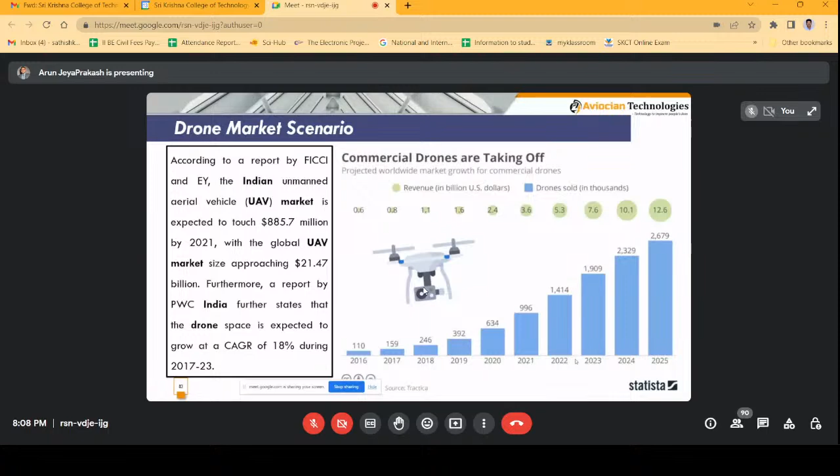And market scenario, if you see globally, the drone sector is a very good sector. It's growing year by year. And even here, as per the FICCI report, the market is expected to go to 885.7 million. I believe it would have dropped a little bit because of COVID in between, but I strongly believe the compound annual growth rate will reach 18 and more than that by 23.

Yeah, so that's it about today's presentation regarding drone applications with respect to mechanical and civil engineers.

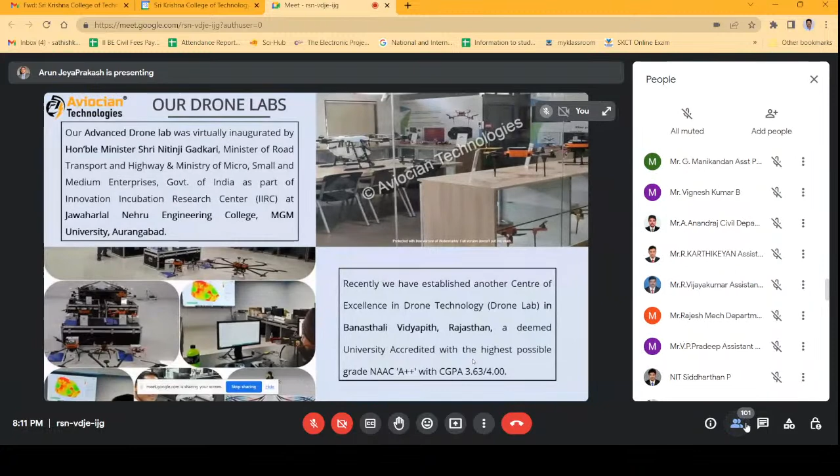We also do the training on collecting data and post processing using software, how to generate those different outputs like orthomosaic, DSM, contours, or 3D model. So we do it as a workshop in academic institutions, majorly for the civil engineering department.

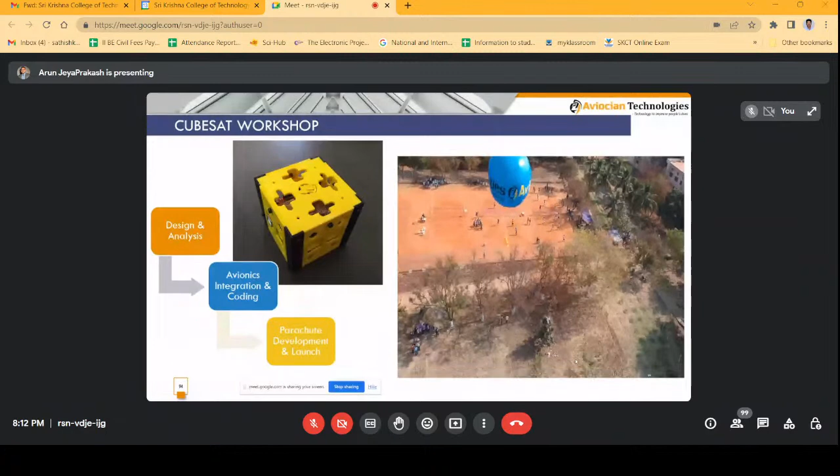We do that. So CubeSat is something we recently launched, where we create a cube satellite and launch it through a balloon at a fixed altitude. It gathers information like pressure, temperature, humidity, UV intensity, all those things with respect to time. That data is then plotted as a graph. So that's a 2-day workshop we do.